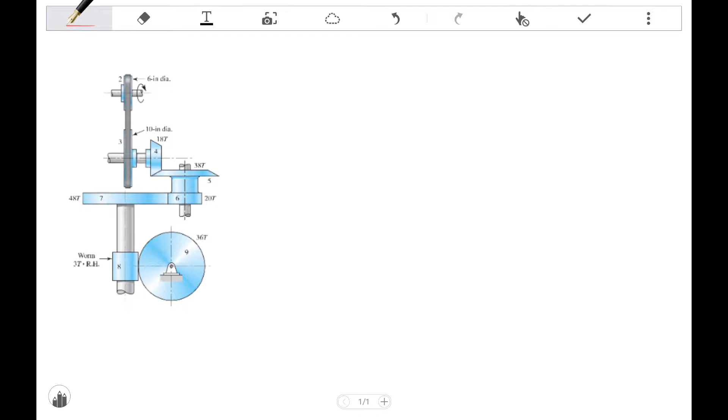So today we're going to be looking at this problem here. We're asked to find the speed and direction of the output gear. This is the output gear, and we're supposed to find the output torque as well and the output power. So we want to find three things.

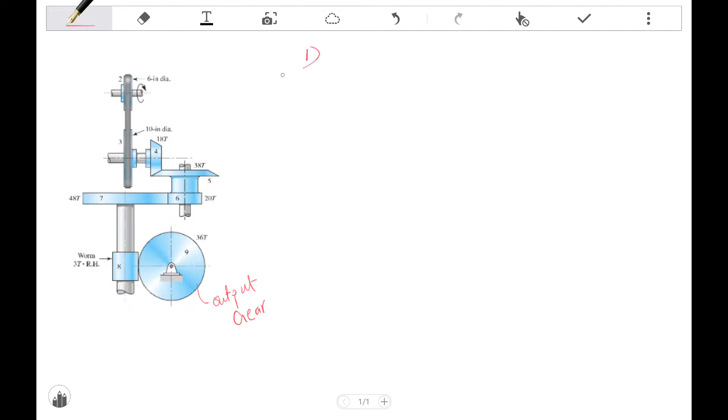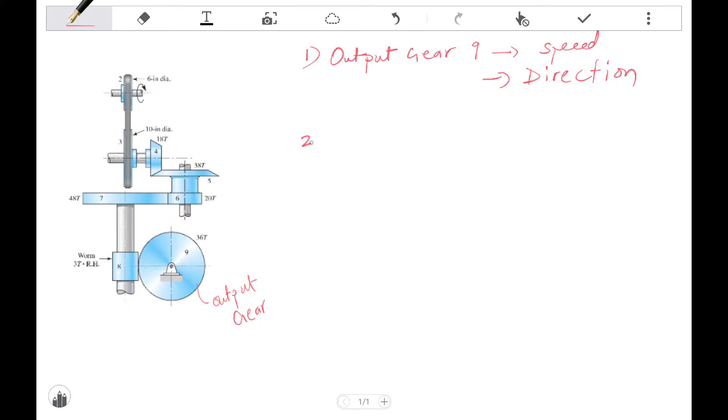So output gear 9, we want to find the speed and direction. The second thing we want to find is the output horsepower, and the third thing is the output torque.

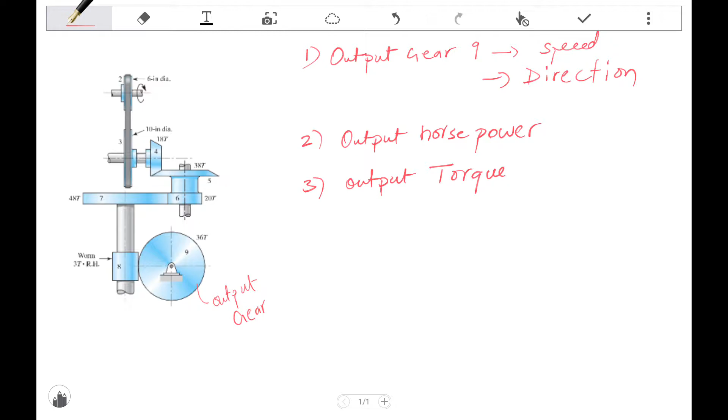Okay, so let's go quickly over the problem here. So we've got a pulley, 2 is a pulley, 3 is a pulley as well. We've got a belt going through here, and it's spinning clockwise. So it's clockwise, and speed is at 1200 RPM, revolutions per minute. And the input power is 1.5 horsepower.

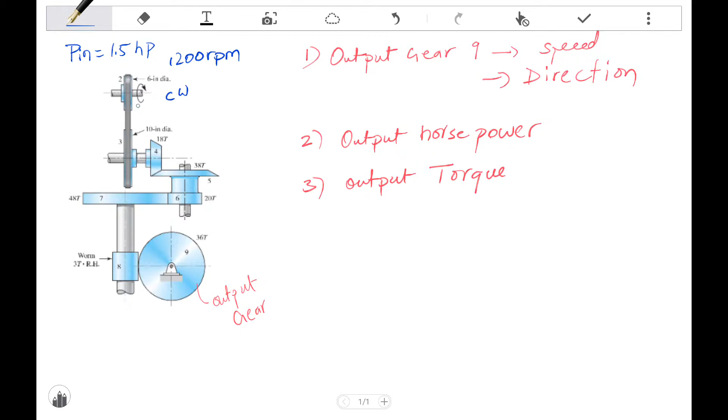Okay, so if you follow along the cursor with me, this is clockwise, that means it's going up and down like this. So it's rotating this way.

That means it's going up like this, and the same thing here, so this is going to be going clockwise as well. That means this baby here is doing the same thing, so it's rotating clockwise as well.

So if it's rotating clockwise, that means it's pushing out of the page, if that makes sense. Hence, this gear here will move in this direction, it'll move like this, if you know what I mean.

Now, for short symbols, I'm going to make this like this. And now this rotation is followed down here. So this guy is spinning, let's see. If I look at it from this axis here, it's going in this direction, it's going clockwise again. So if that's going clockwise, that means this is going to be the opposite of it.

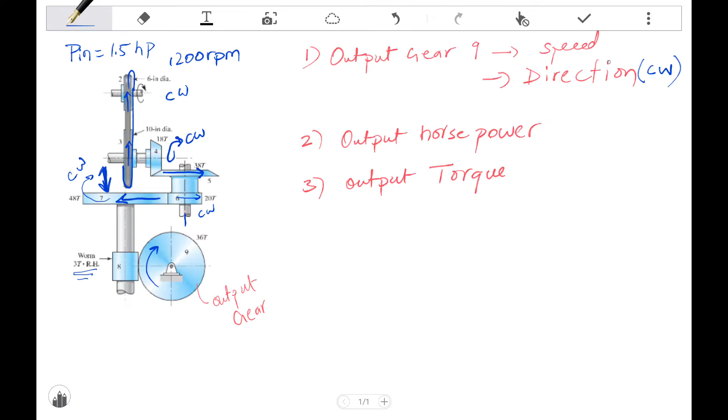Now in order to find the speed, we need to go through the train ratio or the gear ratio. So let's do that, train value. So let's define that first: it's the speed of the pinion divided by the speed of the gear, or N is for speed in RPM.

So N in over N out, and that's also equal to the number of teeth of the gear divided by the number of teeth of the pinion, and that's the diameter of the gear divided by the diameter of the pinion.

Okay, so let's do that. Based on this, the train value is basically equal to velocity ratio 1, velocity ratio 2, and velocity ratio, whatever n value you have, okay. So that's VR, and that's more like it.

Okay, so let's do that. Train value: the first one is a belt, so we have a small pulley and the larger pulley. The smaller pulley is the input, right? And what do we know, it's the in, it's the pinion, and that's the gear. So basically in, out, this is in and this is out here. So let me get rid of all this stuff here.

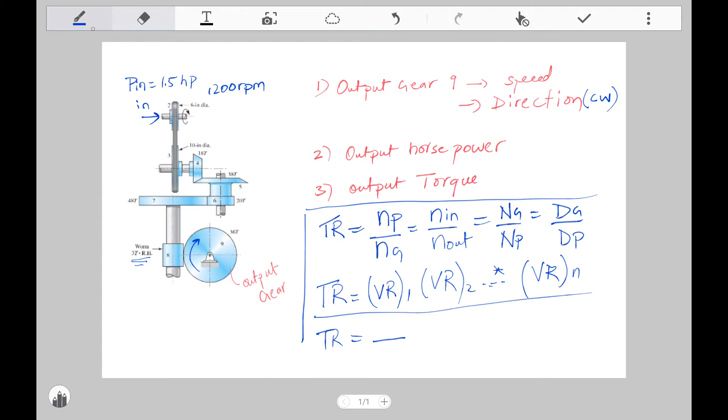Okay, so this is going to be your out. So we have the diameter, so we're going to use the diameter. So remember that NG here is the out, right, it's the gear. So in this case, if I look at the G and the out, that means we're going to go 10 inches divided by 6 inches times. Now look at the second thing, we're going to look at the bevel gear here.

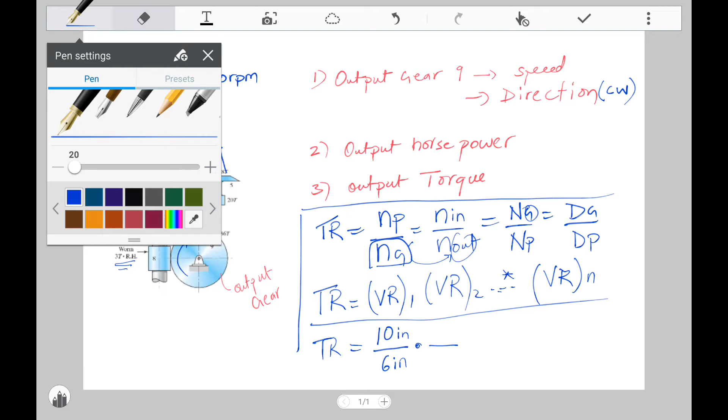So this is the in. So let's get rid of this now, let's focus on the second gear set. So we've got a bevel gear, and let's look at this, this is the in, and this is going to be the out.

So what do we have? We have the number of teeth, okay. So this is called the pinion, basically, and this is called the gear. They're both gears obviously, but whatever gear is doing the input we call it the pinion, or the smaller gear is usually called the pinion. Okay, so usually the smaller gear is called the pinion.

Okay, so now doing that, what do we do now is we're going to go with the number of teeth of the gear, so that's 38 teeth divided by 18 teeth.

And then multiplied by, we're going to look at the last pair here, the one just before the last pair. So we've got, this is called a spur gear. Just to be clear, this was the bevel gear,

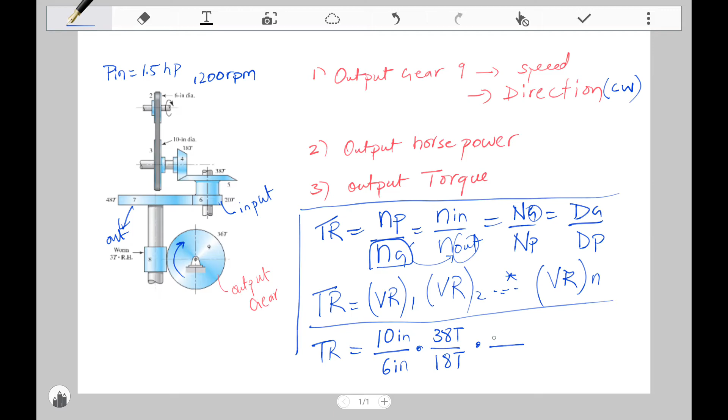Okay, so if I look at the output, which is a gear out, it's 48 teeth divided by 20 teeth. And now, finally, let's look at the worm gear set. Same thing, this is the out, this is the input. Doing that really quickly, we're going to get 36 over 3.

If I calculate that really quick, so 10 divided by 6 times 38 divided by 18 times 48 divided by 20 times 36 divided by 3, we get 101.333. So that's your train value.

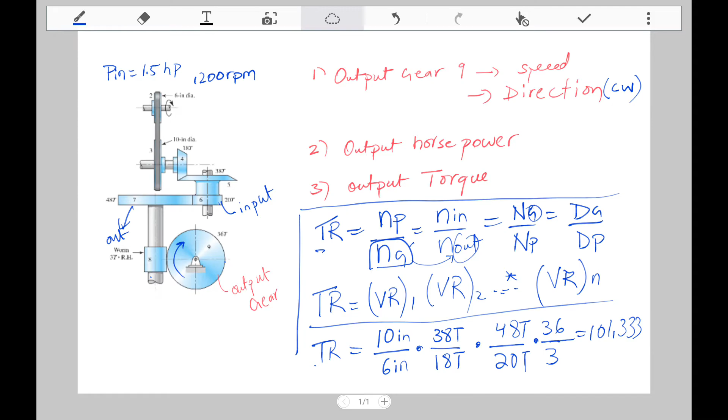So now, going back to this formula here, I'm going to copy this and go to the next page. Get it back on here. Voila. Now, remember this formula we had.

So it's going to be n in, speed in, over speed out. So we know this value, we know this value. Now we want to find n out. So we know this value, now we want to know what this value is.

So if we solve for n out, which is equal to n9, which is what we want, which is equal to gear 9 basically. That's speed, right? And what we find is 101.33 times the input speed, 1200 RPM. No, yeah, that's wrong.

So you know the gear value, so let's do this again. Switching these two, that's 1200 over 101.33. Let's do that. That's 11.842 RPM, so that's your output speed.

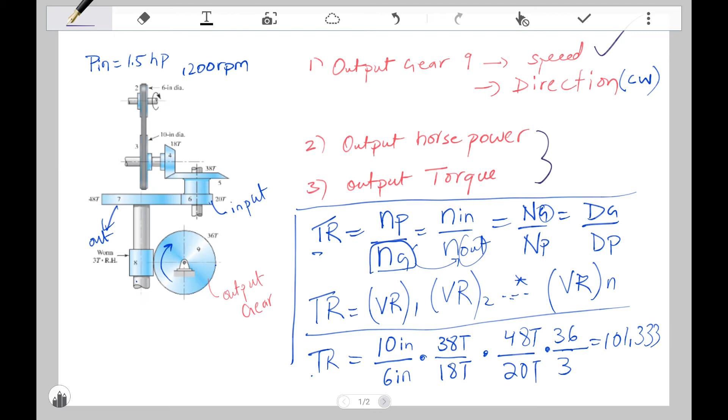So now we're down to finding the last two items. So we've got the speed, now we want to find the output horsepower and the output torque. So in the problem, they give us the overall efficiency, which is equal to E is equal to, let's see.

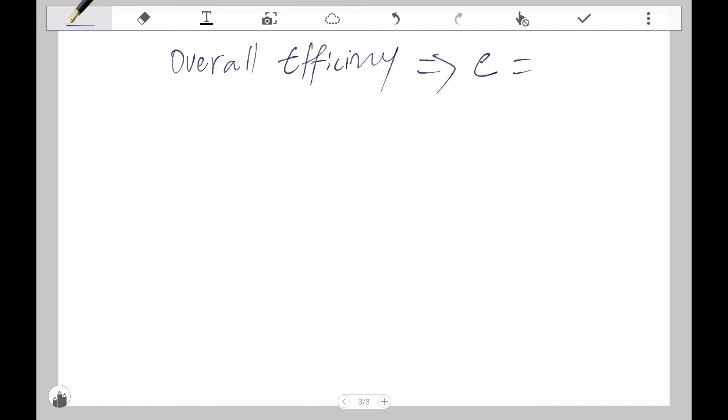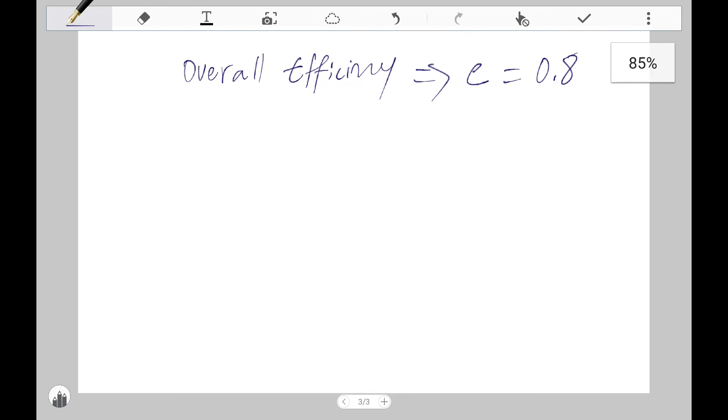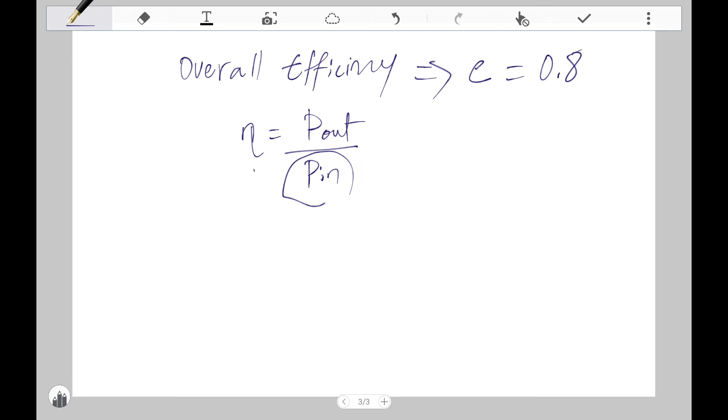They tell you it's 0.8. So we know that efficiency is equal to basically P out divided by P in. So we have P in, we have the efficiency, we can find P out. So let's do that.

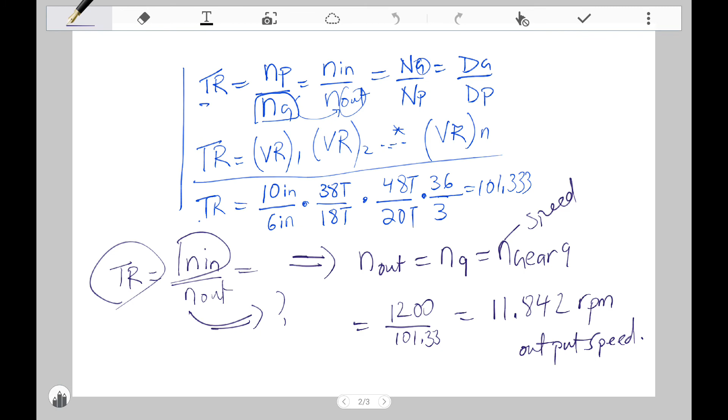Okay, so the efficiency is 0.8 times power in. How much was the power in? Let's go back and see. 1.5 horsepower. So what do we get? 1.5 times 0.8, that's 1.2 horsepower. So we've got the third answer.

Now finally we want to find the torque. So in order to find the torque, we have this relationship: torque is equal to the horsepower over the speed, in radians per second.

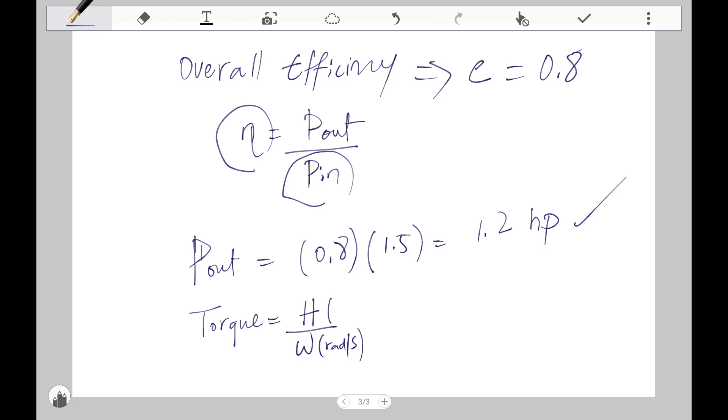And that's in pound... it's in the, what's the horsepower in pound? I think pound feet per second. I think that's what the power is. Double check this, okay? Not positive about this one.

So if we do this now, formulas, so after conversions, you can figure this on your own if you do the conversion. So power out, obviously, we're going to do 1.2 here, divided by 2 pi, because we're converting the output speed to radians per second. Actually, we're converting it to radians per minute, I think that's what it is. Double check this too.